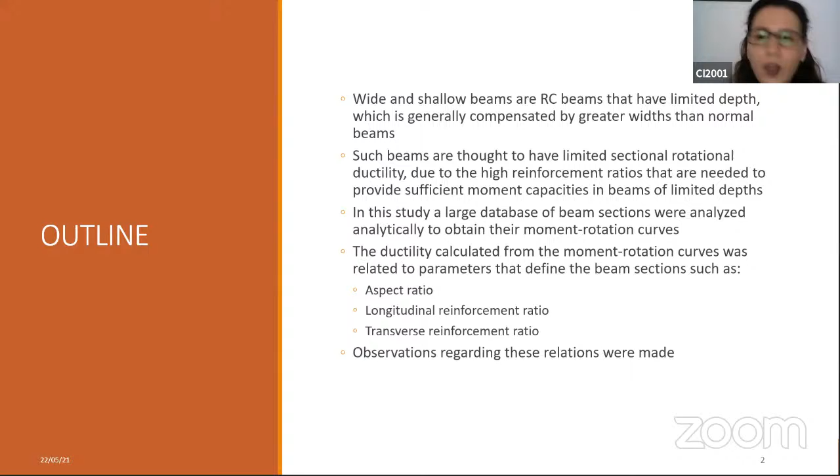We know that ductility is the ratio of maximum to yield displacement, and normally ductility is obtained experimentally from testing full-scale members and obtaining their force-displacement behaviors. But there are considerable software that work on FE principle, which can also help evaluate the force deformation relationships. We used one of these programs, XTRACT, to obtain the moment rotation relationships of the beam sections.

We modeled and measured these beam sections. It is an FE program for member sections. We used the Mander model to model confined concrete, and a strain hardening model for steel, and then we obtained the relationships that we wanted.

Regarding the data pool of the beam sections, we had some fixed properties. Mostly the material properties did not change; we used C30 for concrete and B420C for steel. Some properties varied: we had two types of beam depths, normal wide beams had a depth of 300 millimeters, and normal beams had a depth of 500 millimeters. The aspect ratio, defined as width divided by depth, varied from 0.5 to 2.33, and the reinforcement ratios also varied from design and loading.

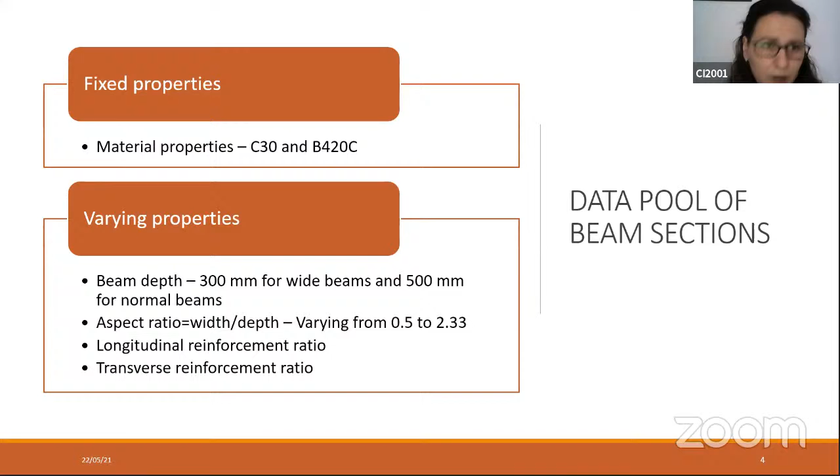Here we have schematically shown the normal and wide beams. Our normal beams all had a section of 250 by 500, while the wide beams had a depth of 300 and width varying from 300 to 700 millimeters. All these beams were designed in accordance with Turkish standards. The normal beams were designed as high ductility class, and the wide beams were designed as limited ductility class.

As I mentioned, these beams were obtained from a full frame design study. They were designed for different load combinations, and different reinforcement ratios and moment capacities were obtained for each of these.

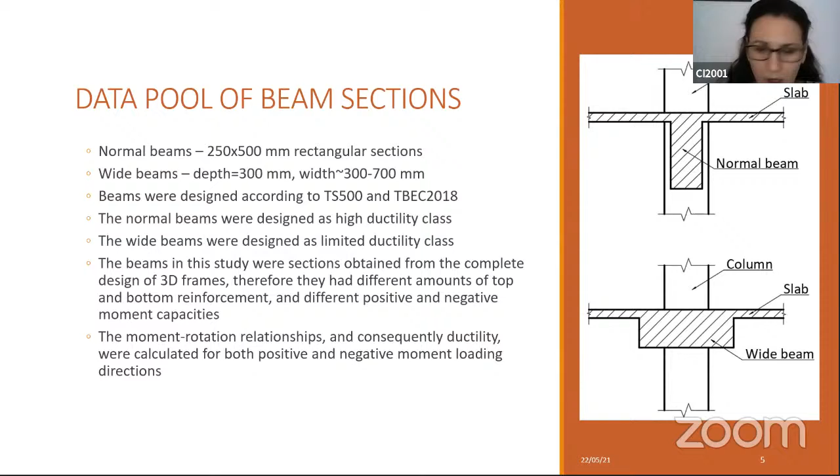Before starting investigating the ductility, we wanted to observe the reinforcement ratios versus the aspect ratio. As I mentioned, the aspect ratio is the one parameter that we can directly correlate to the beam being either wide or normal. All the normal beams have an aspect ratio of 0.5, and the rest of the aspect ratio values indicate that they are wide beams.

If we observe the relationship of aspect ratio with the top and bottom longitudinal reinforcement for the beams, we see that generally normal beams, with an aspect ratio of 0.5, have lower reinforcement ratios, while wide beams have higher reinforcement ratios. This is something we already expected. This is not a conclusion of our study, but just an observation.

When it comes to the transverse reinforcement ratios, in some cases wide beams had the same or greater transverse reinforcement ratio than the normal beams, and in most cases they had lower transverse reinforcement ratios.

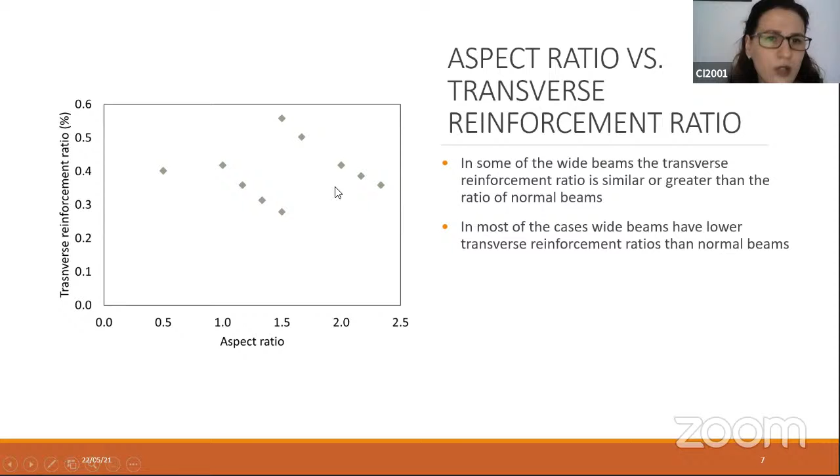Now, the parameter that we expected to have the greatest effect on ductility was the aspect ratio, and also this was the one parameter for which we could draw the strongest conclusion if we were to find relationships.

The values of ductility oscillate around 30. There is this range of 25 to 35 where most of the ductility values are concentrated, but there are also outlier values as low as 20 or even lower, and as high as almost 37.

So from the aspect ratio versus sectional ductility, we were not able to define a clear correlation between these two parameters. Similarly, when we obtained the relationship between ductility and reinforcement, we were not able to observe any clear correlation. For lower reinforcement ratios, there was quite a scatter in the data points.

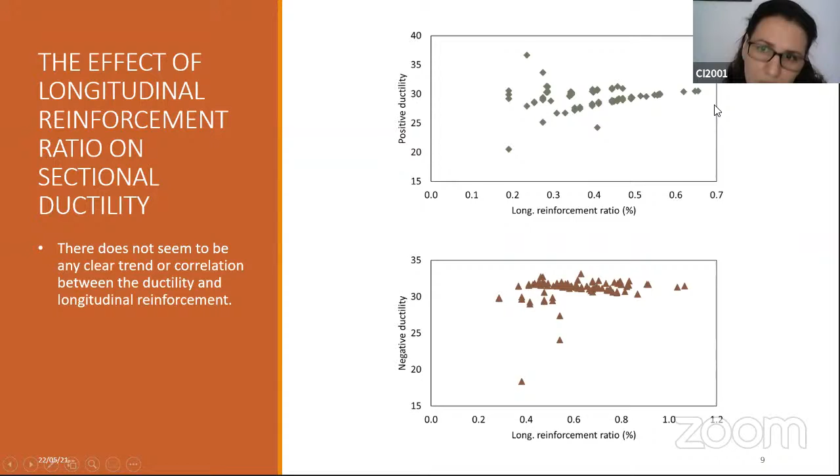The scatter became less when higher reinforcement ratios were present, but there was no clear correlation that we could obtain. Similarly, for the transverse reinforcement ratios, there was quite a scatter and no clear trend at all. For example, in the reinforcement ratios there was some sort of trend, a bit of convergence, but in the transverse reinforcement ratio this was not observed.

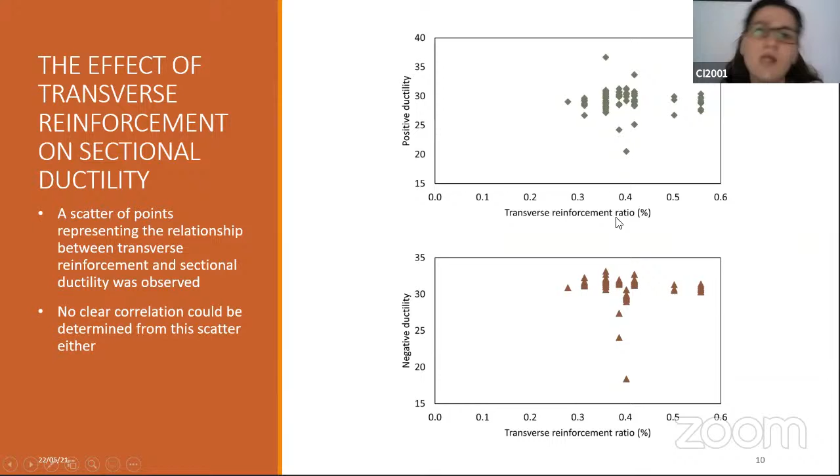So we thought, okay, none of these parameters alone seems to have a clear correlation with the ductility. We also observed that the ductility values seem to range in a certain value interval, so we thought that ductility could maybe be observed as a distribution.

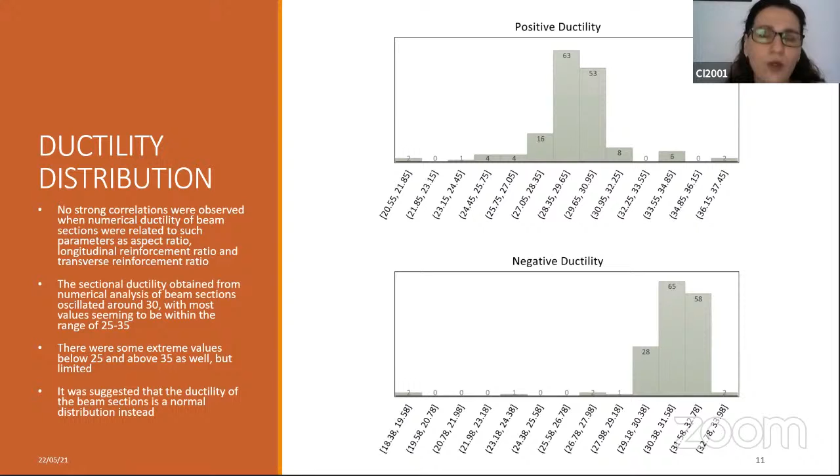So we plotted the histograms of positive and negative ductility values, and we can see that the histograms have quite a bell curve shape, especially the positive ductility, and a bit of a skewed bell curve shape in the negative ductility. So the ductility values for the beams are more of a normal distribution.

Also, if we observe the mean values of ductility, both for all the beams and for normal and wide beams in separate data sets, we observed that the mean values were very similar for the positive ductility and also quite close for the negative ductility, and the variance was very small as a matter of fact.

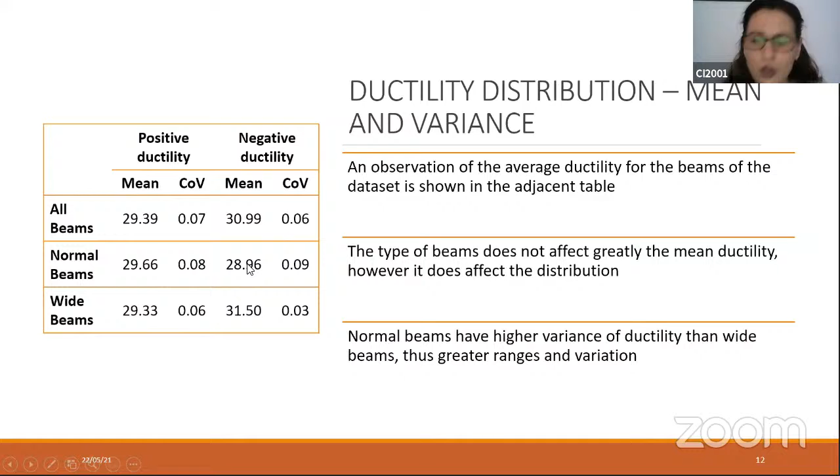So to wrap up the study that we did, we had a database of more than 150 beams that was investigated to draw relationships, if possible, between section parameters and ductility obtained numerically. All the beams were code-designed.

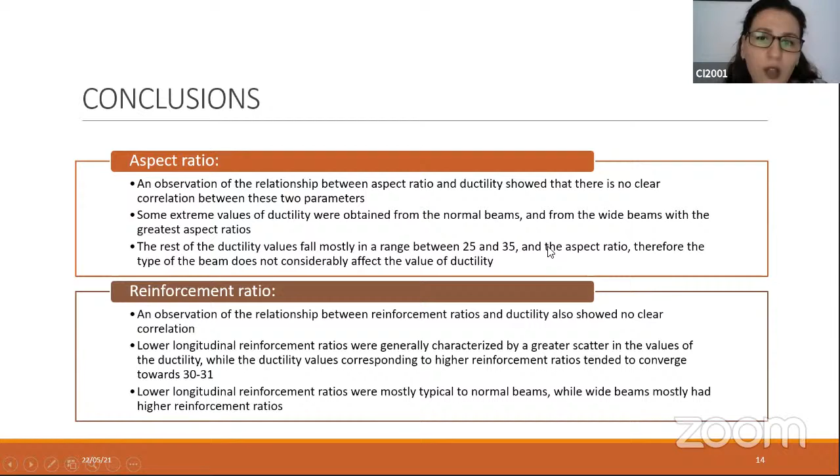Normal beams were high ductility and wide beams were limited ductility. But we were not able to find a clear correlation between ductility and aspect ratio, or ductility and reinforcement ratios. We observed that there was a ductility range mostly between 25 and 35, so we thought that ductility could be more treated like a distribution. This was also supported by the fact that the mean values of ductility were very similar for wide beams and normal beams.

While we were not able to find a correlation between the parameters, probably because the correlation is much more complex than ductility versus one simple parameter, we observed that all types of beams displayed similar levels of rotational ductility, even though they were designed differently, the normal beams as high ductility and the wide beams as limited ductility.

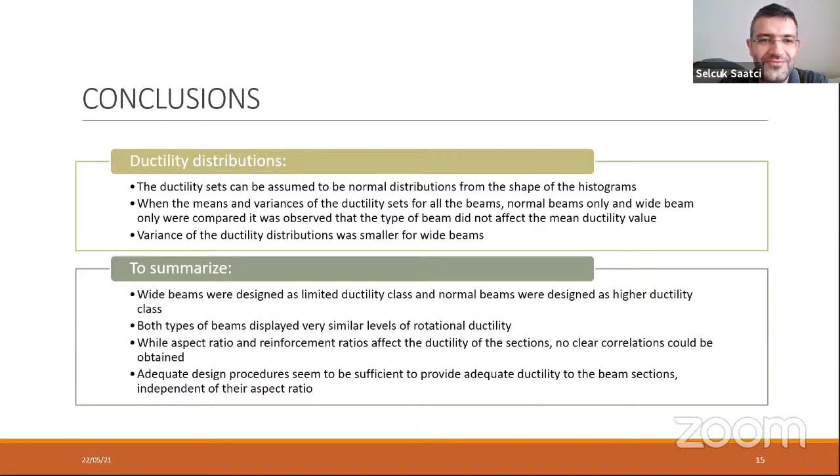Well, thank you, Ms. Lalaj. That was a very nice presentation, actually. I had the chance to be in Ms. Lalaj's PhD committee, and it's a very nice work. Thank you very much, it was a nice presentation. Thank you very much for your words, Professor.

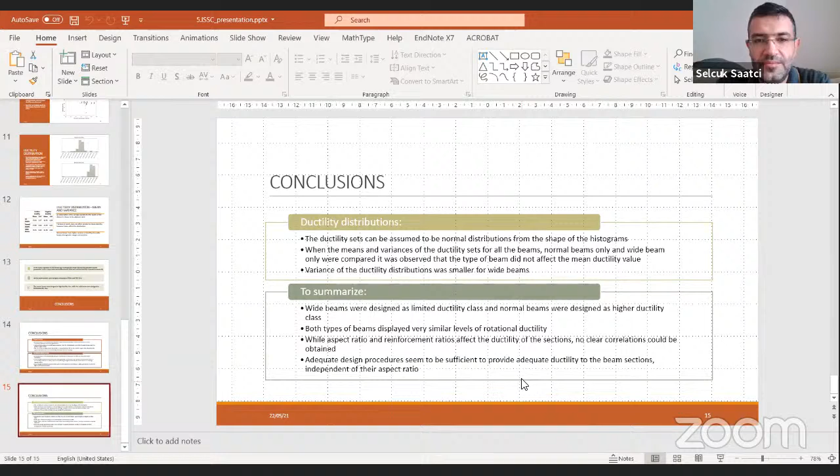Okay, so if we don't have any questions from the audience, we can move on to our next presentation by Mr. Ehsan. He will present the numerical analysis of flush end plate beam to column connection using mathematical model and finite element model.

Mr. Ehsan, if you can introduce yourself with a couple of words at the beginning, and then we will be pleased to hear your presentation. Hello everyone, can you hear my sound? Yes, hello everyone, my name is Mohammed Haroon Ehsan. I am from Afghanistan, and I am a master's student in Khatib University in the Civil Engineering Department. I'm in Turkey since 2017.

My topic is, let me share the presentation. The title of the topic is the numerical analysis of flush end plate beam to column connection using mathematical model and finite element analysis.

In the analysis and design of steel structures, beam to column connections are generally assumed as entirely rigid or perfectly pinned. This assumption simplifies analysis and design steps and is referred extensively in structural engineering practice. However, experimental studies conducted in recent years have revealed that handling some beam column connections as entirely rigid or perfectly pinned does not give realistic results. In fact, most of the connections used in current practice have some certain amount of stiffness which falls between the extreme cases of entirely rigid and perfectly pinned.

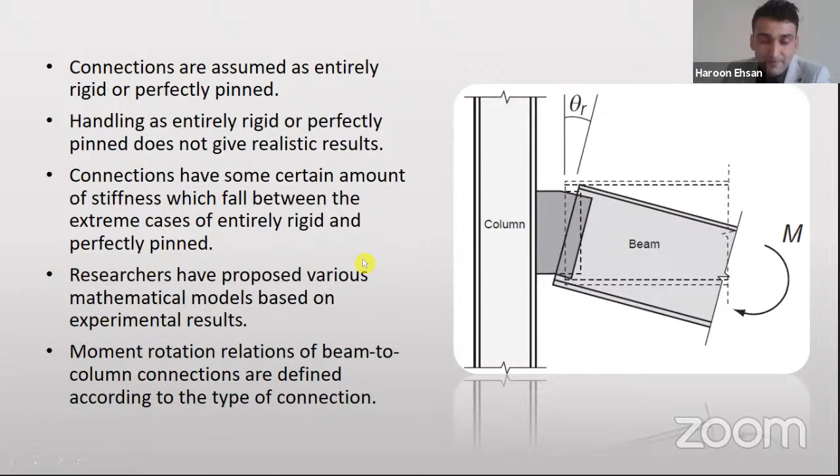In order to model the beam to column connection properly, several researchers have proposed various mathematical models based on experimental results. In these models, the moment rotation relation of beam to column connections is defined according to the type of connection. In this study, the moment rotation behavior of beam to column connection formed by flush end plate is investigated using finite element analysis and a well-known practical mathematical model. Moreover, the numerical analysis outcomes were compared with the test results of a reference study from the literature.

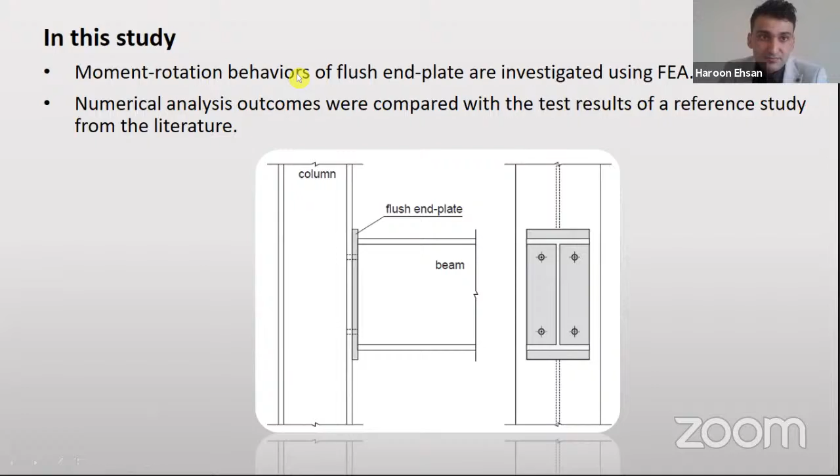These papers also showed the importance of structural design parameters in determining the moment rotation relationship of flush end plate type beam to column connections, and evaluated the efficiency of the practical numerical models. End plates are widely used in steel structures, which consist of two main types: extended end plate and flush end plate. Various analytical and numerical methods have been developed to study the semi-rigid characteristics of beam to column joints, as well as their influence on the response of structural elements.

In order to predict the moment rotation behavior accurately, a large number of studies have been performed on end plate bolted joints considering experimental, numerical, and analytical approaches. The types and details of the studied connections are numerous and innovative, and they concern many parameters such as diameter and number of bolts, pretension force of bolts, thickness of end plate, beam and column dimensions, steel yield strength, stiffening type, and coefficient of friction between contact surfaces.

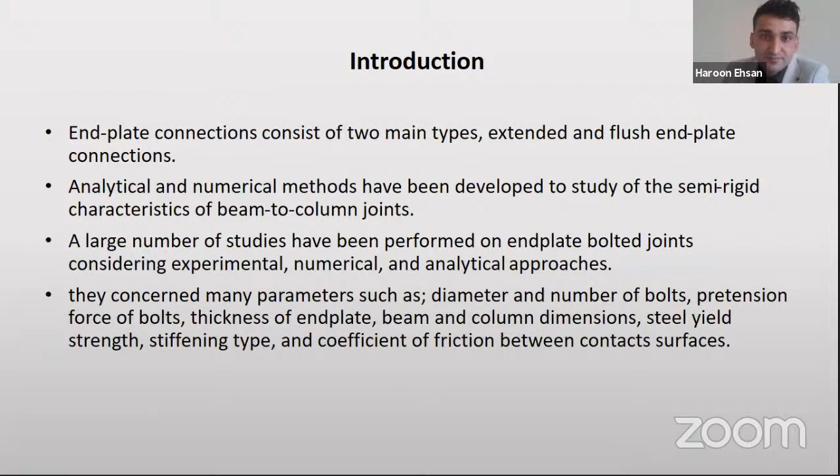The first finite element analysis of end plate connections was performed by Krishnamurthy. Tarpy and Cardinal carried out an elastic finite element study of unstiffened end-plate connections that was verified experimentally, and they also proposed a design methodology for these joints. Maxwell also developed a prediction equation for the ultimate moment of connections, as well as their moment rotation relations, based on finite element analysis and on tests.

Jenkins also did finite element analysis on flush end plate connections, and those extended on one side, then put forward a bilinear model for flush end plate connections. Kukreti adopted a two-dimensional finite element analysis model to calculate 50 flush end plate connections and verified the recommended moment rotation relationship for this type of connection based on regression analysis.

Sherbourne and Bahaari used two-dimensional and then three-dimensional finite analysis models to model end plate connections. Ade indicated that the presence of stiffeners on the extended part of the end plate increased the flexural strength of the connections, as well as its rotation and energy dissipation capacity.

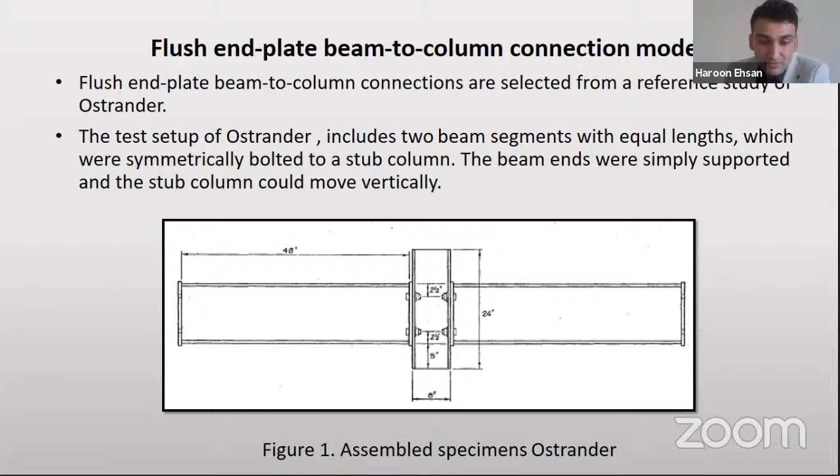The geometries of connection models: Ostrander's experiments include 24 test specimens of flush end plate connection. In this study, 7 specimens representing various types of configurations are accounted for, with end plate thickness and stiffeners of the column web as the main parameters focused on. The geometric properties of the 7 connections analyzed in this study are presented in table 1.

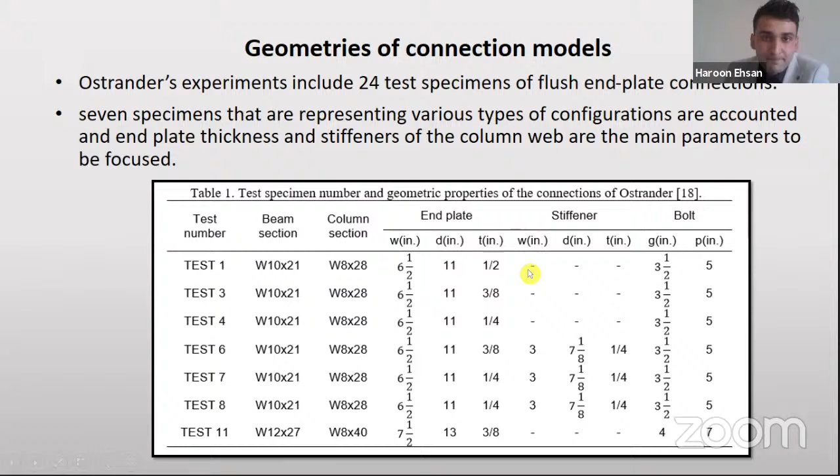Finite element modeling: the three-dimensional finite element model is used to generate the effective moment rotation response of the connection. Geometric details of all components used in flush end plate connections are the same as those of the tested specimens given in table 1. Due to the symmetry of the geometric details, loading, and boundary conditions, only the connection on one side of the cruciform arrangement was modeled to reduce computing time.

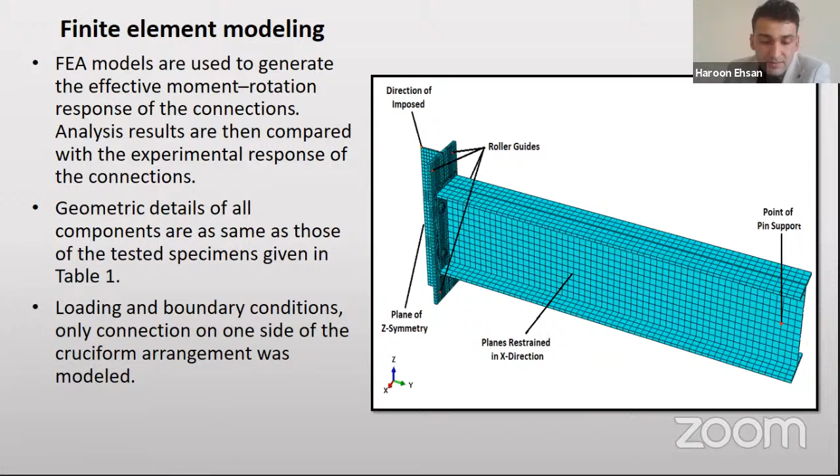The hexahedral solid element C3D8 type with 8 nodes was used with reduced integration and hourglass control as the element type. The mesh density was increased in the critical zones of the connection. The contact area, including the bolt head and nut components, was modeled by implementing the penalty contact algorithm with a finite sliding scheme. The normal behavior between two surfaces is defined as hard contact, and the coefficient of friction was taken as 0.33 in the tangential direction.

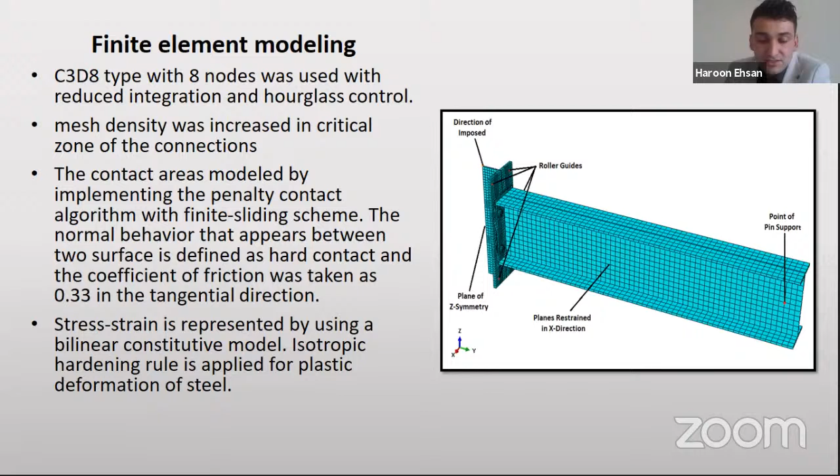Boundary conditions and applied loads: the boundary conditions defined on the model realistically reflect the experimental setup. In order to disallow local deformation under the concentrated force, the column top surface is coupled through a coupling constraint to the load application point.

The bolt pretension load is applied as the first load case, and for this purpose a thermal gradient is applied on the bolt shank to yield an equivalent pretension force. A force of 133 kilonewton is applied to the 19.1 mm diameter bolt. A 50 mm vertical displacement is applied on the nodes of the load application point.

The resulting moment and relative rotation of the connection are evaluated from equations 1 and 2. The moment is evaluated from equation 1, and the rotation is evaluated from equation 2, where M is the applied moment, P is the summation of the reaction of the applied displacement on the beam, L is the beam length, R is the rotation, and D1 and D2 are the top and bottom flange horizontal displacements respectively.

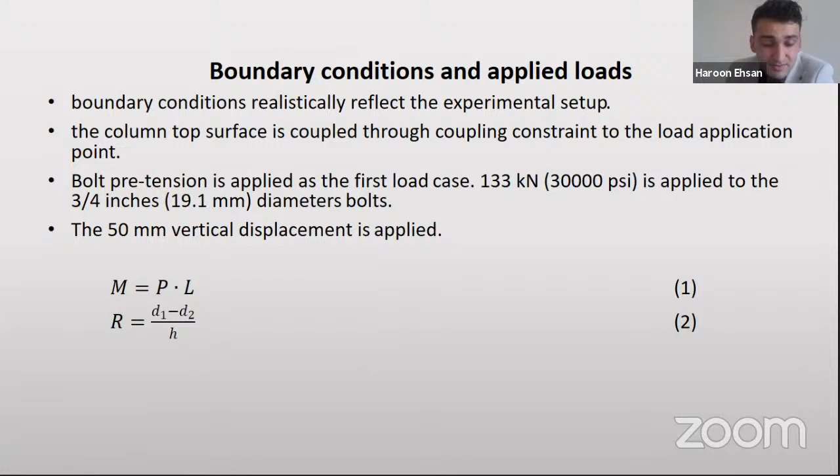Effect of bolt pretension load: now it's possible to extend the study of the connection beyond the experimental data, having the prediction capability of the proposed modeling approach. The model is used to study the effect of bolt pretension on the response of the flush end plate beam to column connection. A variation of pretension load is modeled in order to monitor its effect.

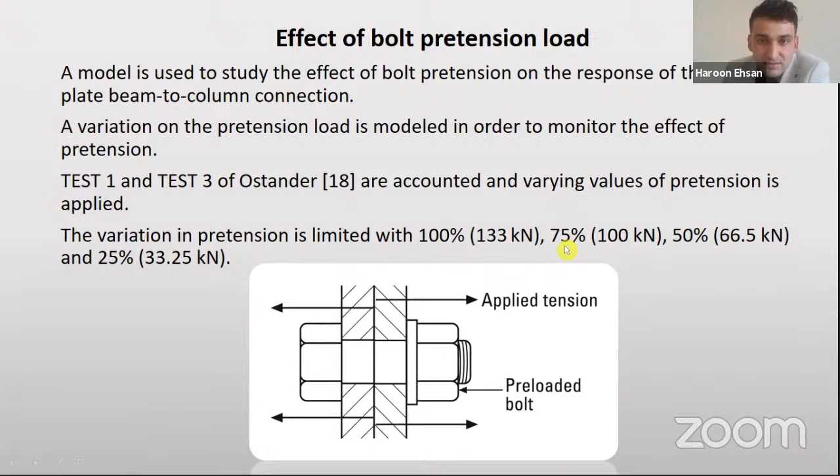Test 1 and test 3 of Ostrander are considered, with varying values of pretension applied. The variation of pretension is set as 100% equal to 133 kilonewton, 75% equal to 100 kilonewton, 50% equal to 66.5 kilonewton, and 25% equal to 33.25 kilonewton. The analysis results of test 1 and test 3 with varying pretension load are shown in figure 5 and figure 6. Figure 5 shows the moment rotation response of test 1 connections with varying bolt pretension at 100%, 75%, 50%, and 25%.

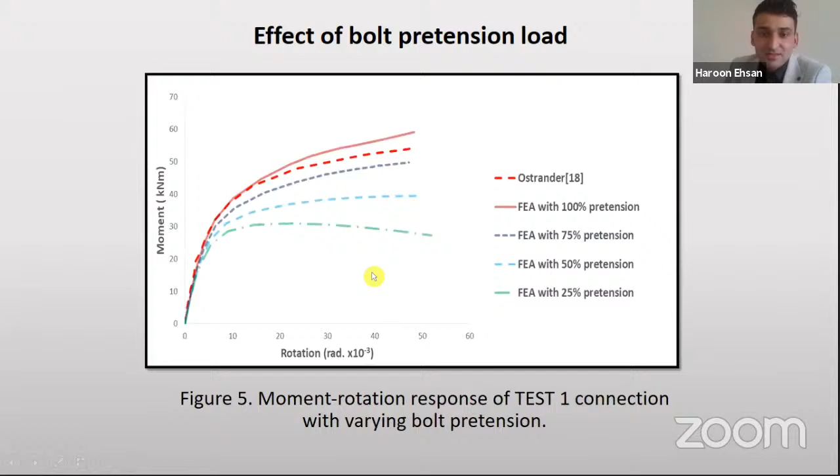And conclusion. In this study, the moment rotation behavior of bolted flush end plate connections are investigated using a three-dimensional finite element model and a practical mathematical model. The numerical analysis results are compared with the test results of a reference study from the literature. Analysis results show that the finite element analysis and mathematical model have good agreement with the test data of the reference study. On the other hand, the effect of bolt pretension load on the response of flush end plate connection is focused. The finite element analysis results reveal that pretension loads have a significant effect on the moment rotation curve of flush end plate type connections.

Thank you for listening. Do you have any questions?

Okay, thank you, Mr. Ehsan. Do we have any questions from the audience? Well, thank you again, it was a very nice presentation and nice study. Are you about to finish your study, or are you in the middle of it?

My study is... no, I haven't finished yet. My study will maybe be finished this semester. This topic is a part of my study.

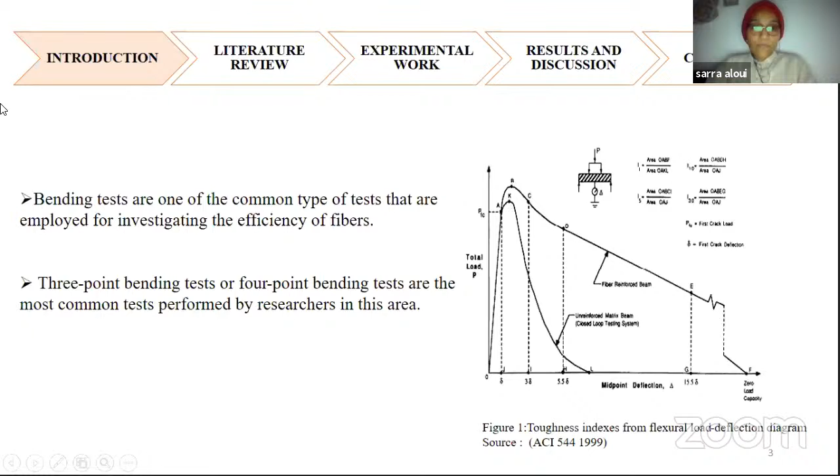The objective of this study is to improve our knowledge on the use of hybrid reinforced concrete beams, where steel and polyvinyl alcohol, named as PVA fibers, are used in the same mix under 3-point and 4-point bending tests, as well as to obtain the effect of fiber hybridization on the bending behavior.

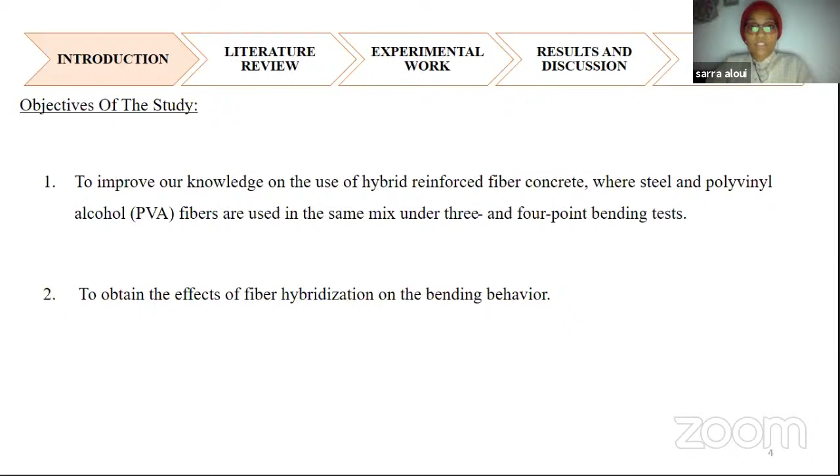In the literature review part, two articles will be presented. The first one, done by Zhang in 2019, tested specimens with the usage of PVA under 4-point bending test with different volumetric ratios, from which we could conclude that PVA fibers can improve the flexural strength of concrete and can decrease crack propagation.

The second one is done by Caggiano in 2016, where a high amount of steel fibers in the mix was concluded to be more advantageous, as well as we could conclude that a high amount of polypropylene can result in a general reduction in strength and toughness.

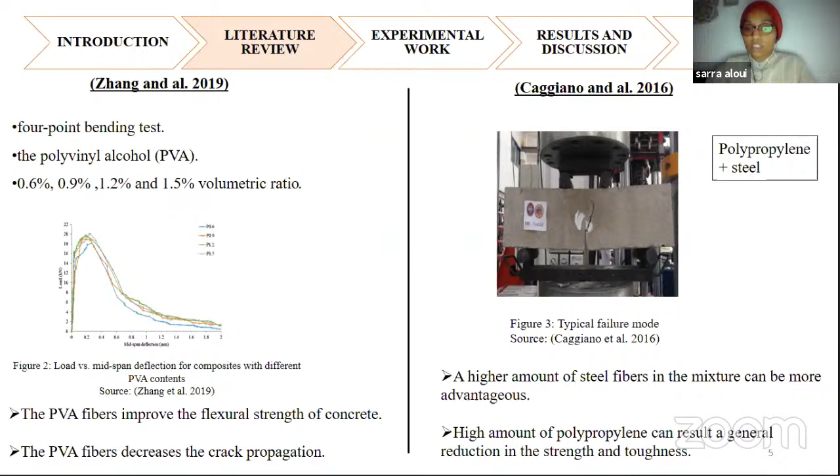Now I'm passing to the experimental work. During this project, we cast a number of beams in the laboratory, where the concrete mix content mainly had Portland cement, class F fly ash, and two types of aggregates, in addition to a superplasticizer. As reinforcement, two types of fibers were used.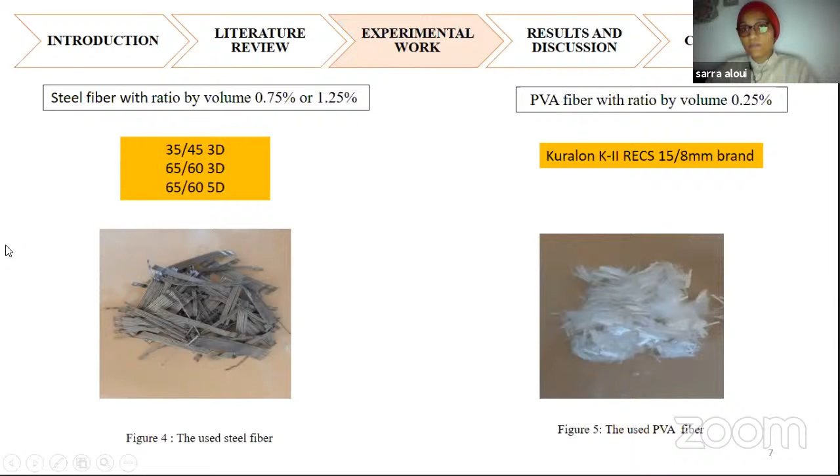The first one is steel fibers, of which we used three types, shown in figure 4, and the PVA fibers shown in figure 5.

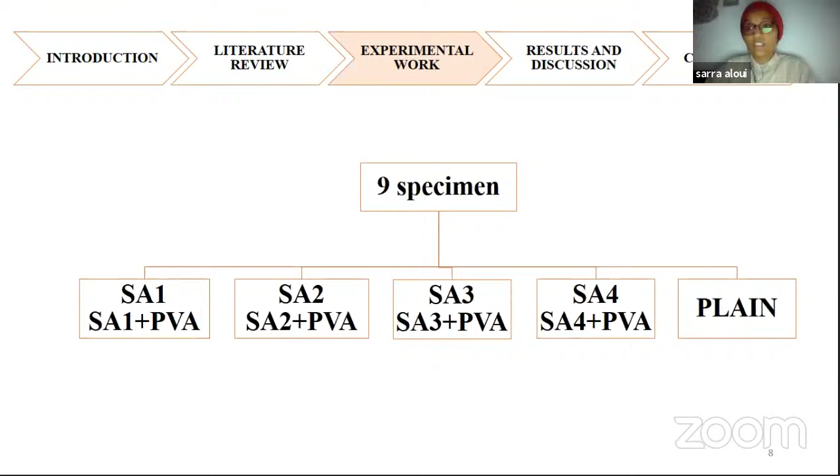To obtain the best results, 9 specimens were cast, named SA1, SA2, SA3, and SA4. For each of them, 2 specimens were cast: the first containing just steel fibers, and the second containing both steel fibers and PVA. The last one is named plain. It does not contain either steel fibers or PVA; it's done just for the controlling part. This table can show us more.

Specification of the specimens: for SA1, SA2, and SA3, the steel fiber content is equal to 0.75%. But for specimen SA4, it has a higher steel fiber content equal to 1.25%. The PVA fiber content is stable for all of them at 0.25%.

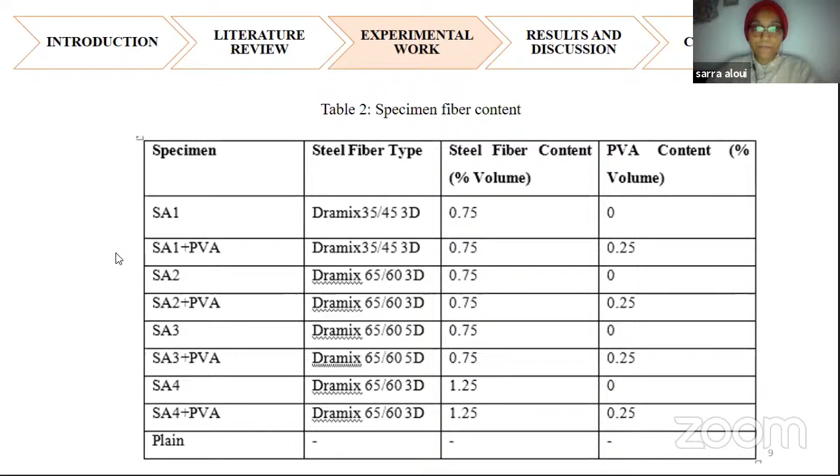To obtain the best results, 3 tests were executed in the laboratory. The first is a 3-point bending test, where beams with dimensions of 2.5 length, 0.5 width, and 0.05 height were tested, with the specimen in simply supported conditions, as shown in figure 6. A load was applied by a displacement-controlled hydraulic actuator at the mid-span, with a steel cylinder forming a linear load distribution. 12 linear resistive position transducers were attached at the bottom of the specimen, and a load cell was applied under the loading head of the hydraulic jack to measure the applied load.

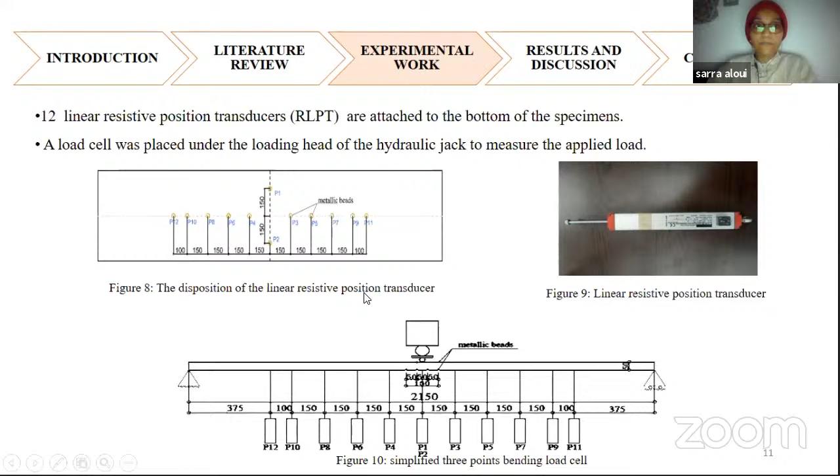During this experimental work, the crack opening was also observed manually with the use of a digital movement gauge, for which we placed metal beads distributed as shown in figure 11.

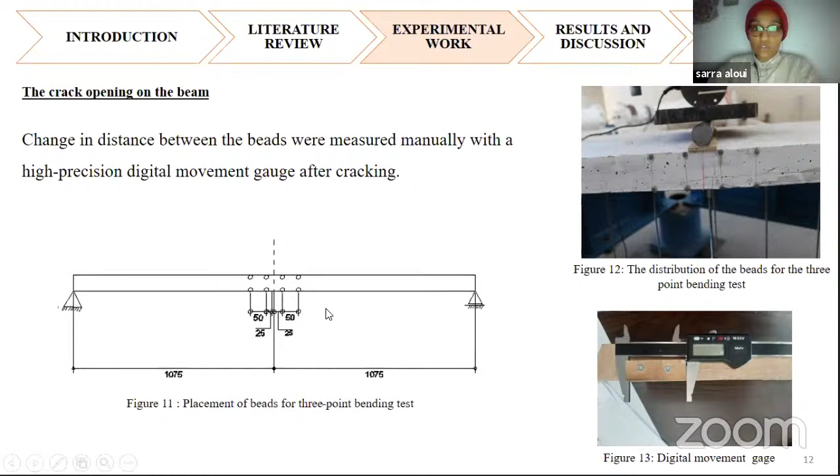The second test is the 4-point bending test, done after the first test. The beam that cracked at the mid-span was cut, and the half that did not see big damage was tested again.

The 4-point bending test was done with the usage of a rigid beam, as we can see here. For this case, just 2 linear resistive position transducers were placed at the mid-span, named P1 and P2.

As well, for the first test, we observed the crack opening by placing the metallic beads.

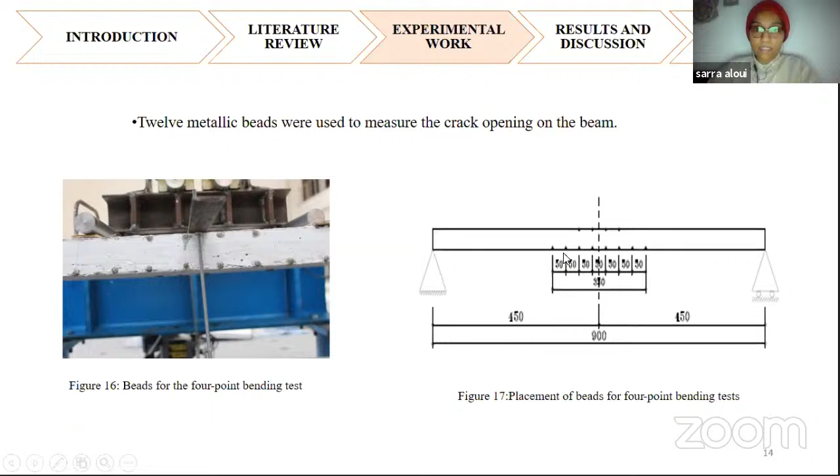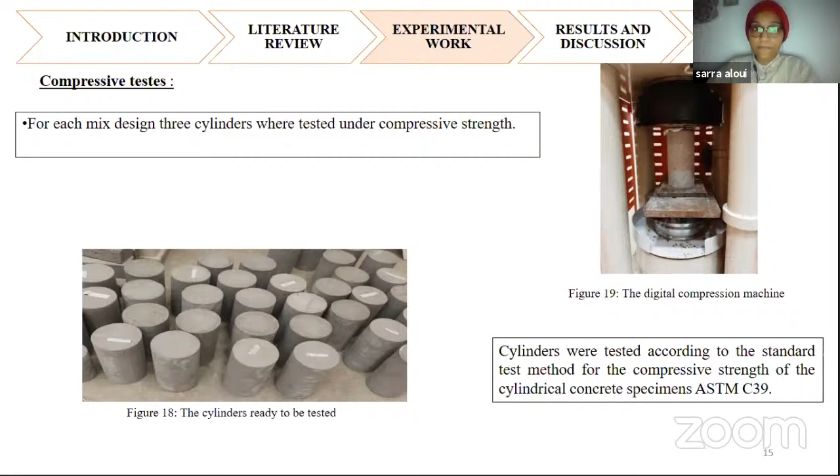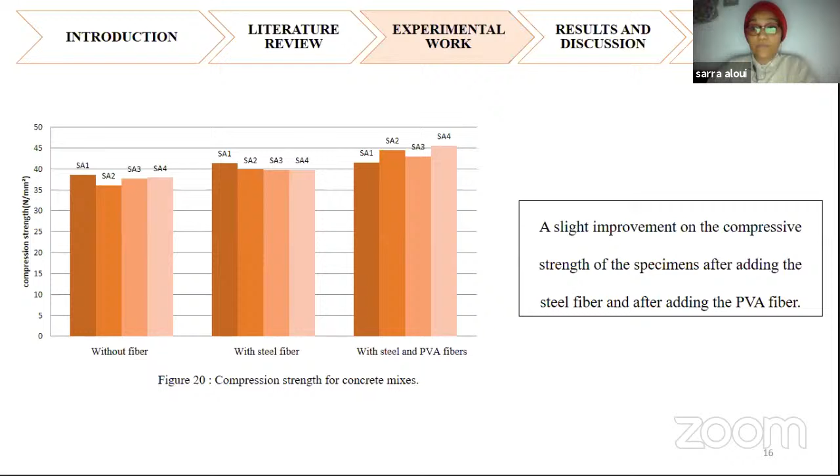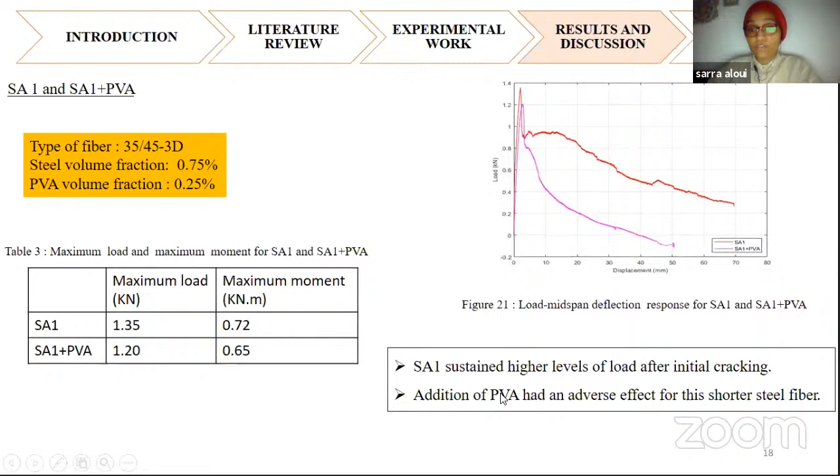For the first specimen, SA1, the specimen with the usage of PVA has a lower maximum load compared to the specimen with steel fibers. We can say that the addition of PVA has an adverse effect for the short steel fibers.

The second one, SA2: here we can see that the load dropped for the specimen with the usage of steel fibers and then rises again. We can see the difference between the maximum load for both specimens. We can say that the addition of PVA has an adverse effect for this mix.

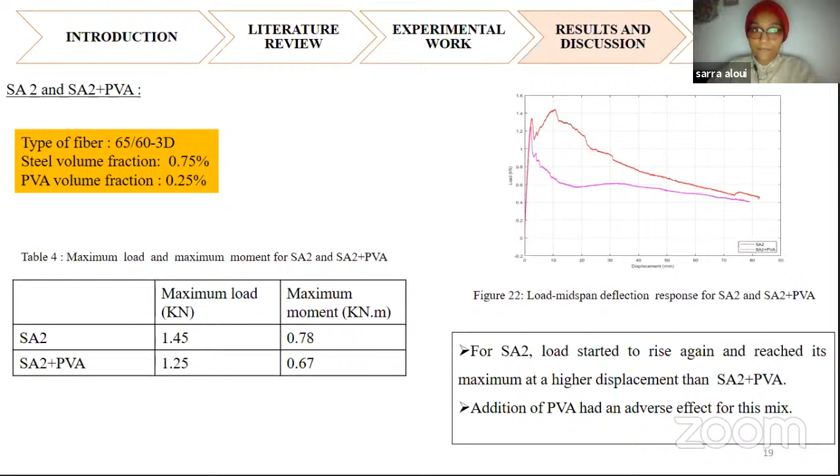The fourth one, SA4, has a higher content of steel fibers. We can see the big difference between the maximum load and maximum moment between the two specimens. Here we can say that the addition of PVA has a serious adverse effect for this mix.

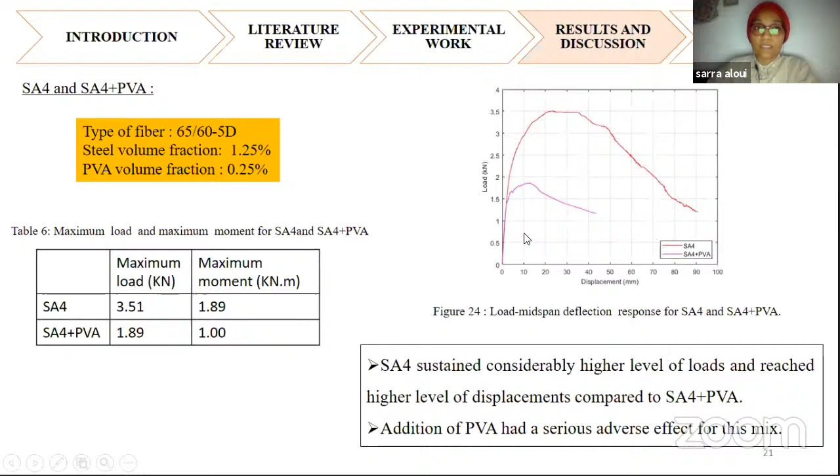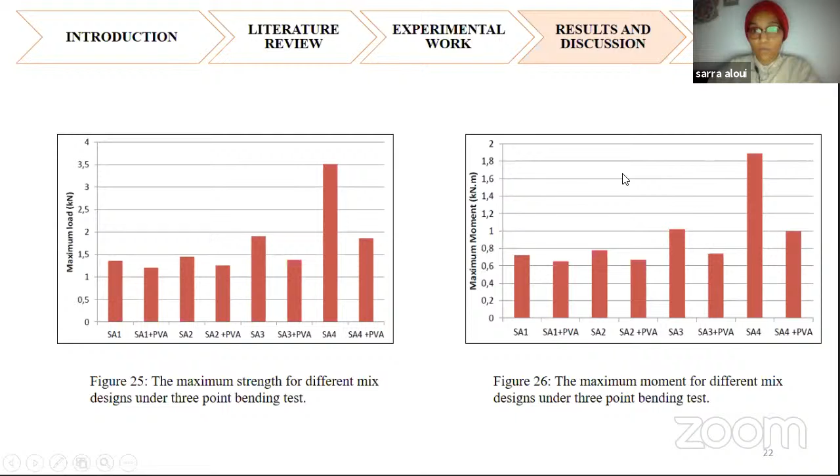From this we could obtain this graphic: we can see that SA4, the last specimen, has the highest maximum load and maximum moment compared to the other specimens. Also, continuing observation of this table, we can say that SA3 also has a high maximum load compared to the others.

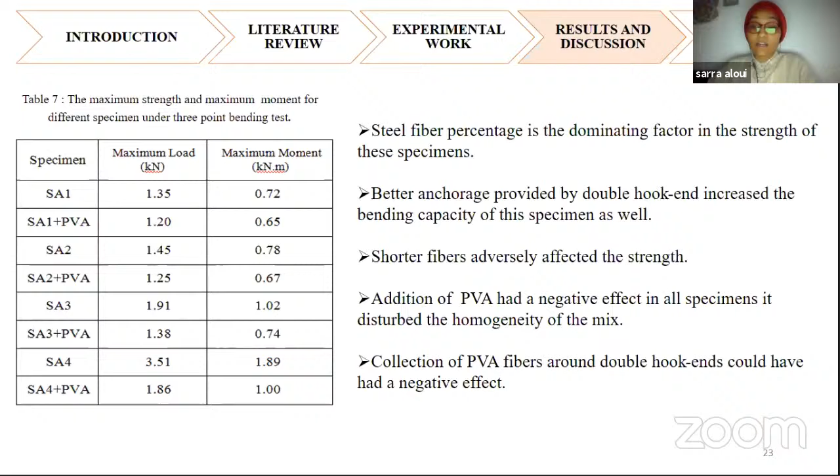We can say that better anchorage is provided by double hooked ends, which increases the bending capacity of this specimen. But for the shorter fibers, it can adversely affect the strength. Generally, we can see from this table that the addition of PVA has a negative effect in all specimens; it disrupts the homogeneity of the mix. This is due to the fibers collecting around the double hooked ends.

Now we are passing to the 4-point bending test.

For the second one, they have a very nearby maximum load. So we can say that the addition of PVA have a neutral effect for this type of steel fibers.

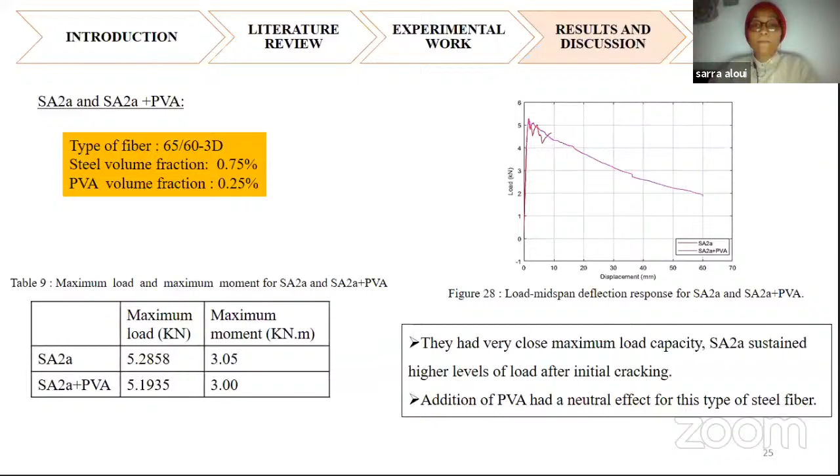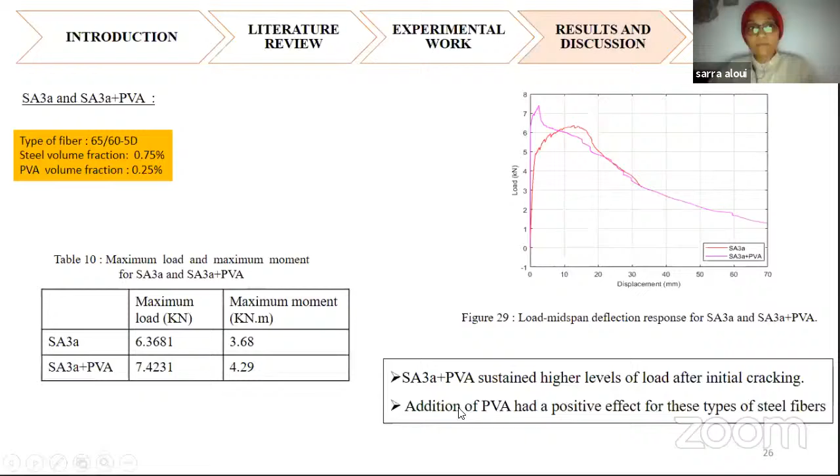For the fourth one, that contains more steel fibers, here we can say the addition of PVA have had a serious adverse effect. So the addition of PVA is not a positive addition for this specimen.

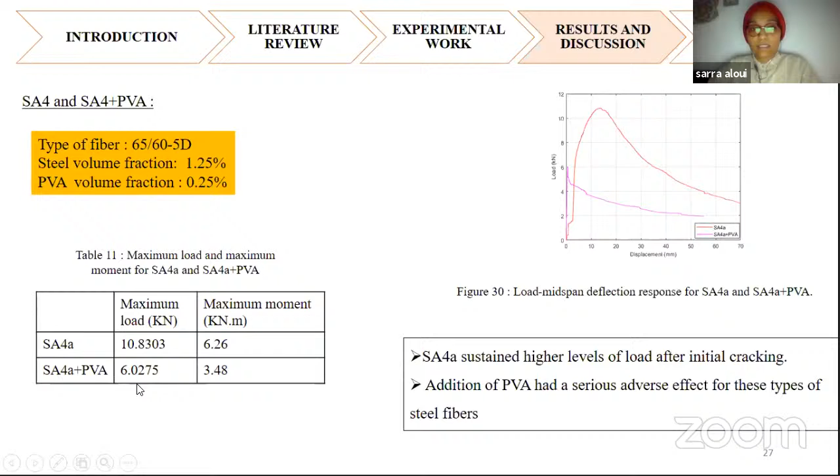If we look at this figure as well, we can see the specimen SA4 have the highest maximum load and maximum moment. From the table we can see that for this type of test, the 4-point bending test, the addition of PVA have a positive effect for all the specimens besides the SA4, because it contains more steel fibers content.

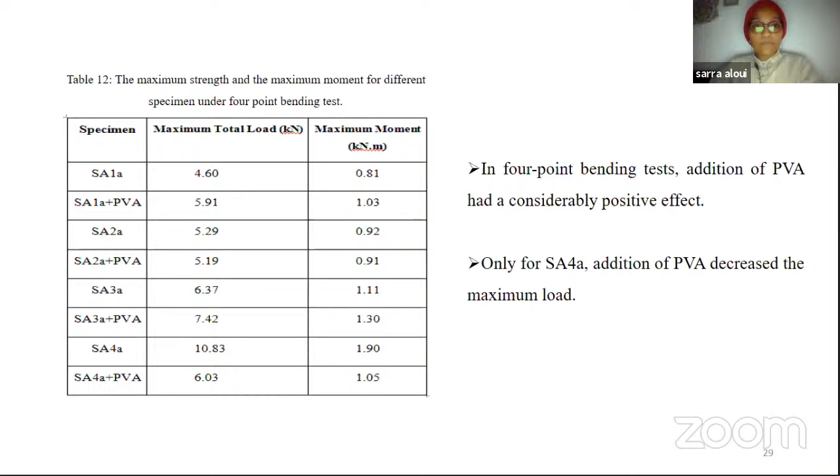Here, if we look at this graphic, the maximum moment for the steel fibers only specimen, that contains just steel fibers. If you compare the 3-point bending test and 4-point bending test, they have very nearby results, but still the specimen with the addition under the 4-point bending test have a higher maximum moment.

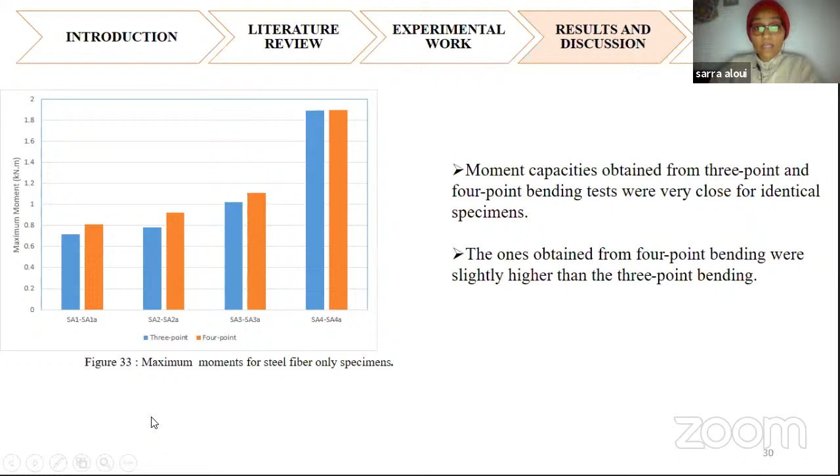But if we look at the maximum moment for specimen with the usage of PVA under the 3-point bending test and the 4-point bending test, here we can say the specimen with the 4-point bending test have the highest maximum moment compared to the other.

Generally we can say that in the 3-point bending test, the maximum moment was at midspan, which caused localization in the cracking. But for the 4-point bending test, the maximum moment acts over a region at the middle, which causes several minor cracks along with a major crack.

Now I'm passing to the conclusion.

The steel fiber geometry, type, and ratio are the principal factors that affect the level of load of the specimen. Like we can see here, the short steel fibers have the lesser maximum capacities. But for the specimen with the long steel fibers, they have a higher maximum load.

Also the type, so specimen with a double hooked end have a higher maximum capacity, or the ratio. So we can see that specimen SA4, which has a higher amount of steel fibers, has a higher maximum capacity.

But we can see here that for the 3-point bending test, the addition of PVA has an adverse effect. It always drops the maximum capacity of the specimen.

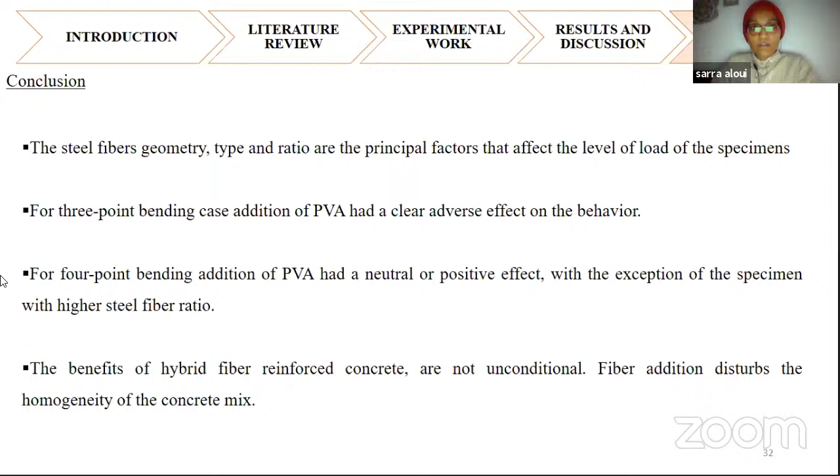First, we're going to introduce some concepts and present the methodology we use to conduct this work. From there, we'll present the experimental study that has been done before, then use the data from this study to create a finite element model with dynamic analysis, and compare both experimental and numerical results.

As we say, the importance of nonlinear biaxial models applicable to the analysis of reinforced concrete frames has been studied by many researchers and proven important in seismic regions.

Reinforced concrete frames are usually subject to a combination of axial and lateral action, as the lateral action causes lateral deflection that in turn affects the horizontal stiffness. So there's a need to simulate the nonlinear behavior of the reinforced concrete frame due to material nonlinearity, and also to model the behavior of the interaction between frame and reinforcement.

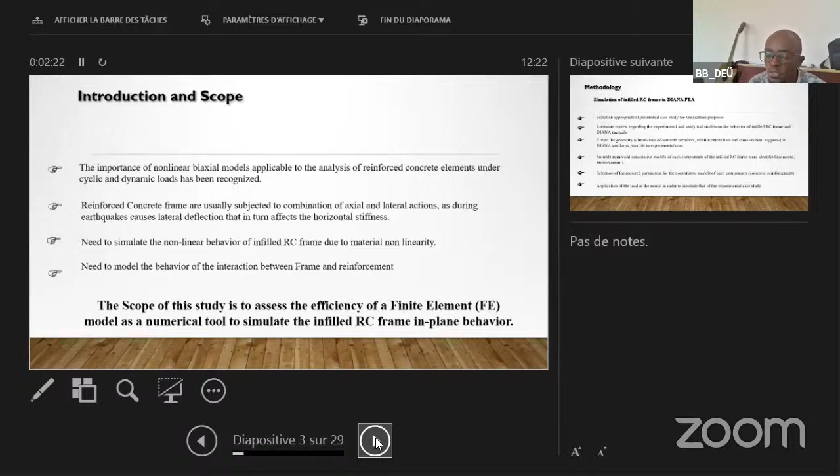The methodology will be to select an experimental case study for verification purposes, review the literature regarding experimental and analytic studies, and review the DIANA manual. Then we create the geometry, depending on the dimensions of concrete members like beam, column, and foundation based on the literature review, along with reinforcement bars and cross sections, and boundary constraints in DIANA made as similar as possible to the experimental case.

A suitable numerical constitutive model of each component of the infill reinforced concrete frame is identified, such as concrete and reinforcement. Then we select the required parameters for the constitutive model of each component, for concrete and reinforcement. Finally, we apply the load in the model in order to simulate that of the experimental case study.

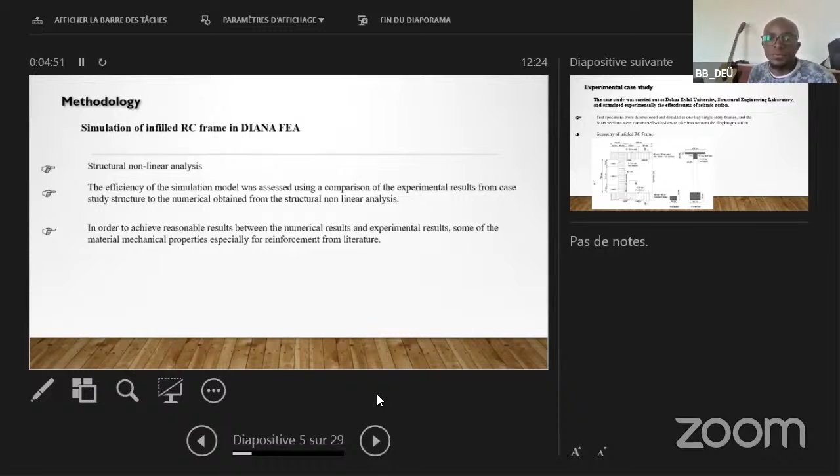In the experimental case, the tests were dimensioned and detailed as a one-bay single-story frame, and the beam section was constructed with a slab to take into account the diaphragm actions.

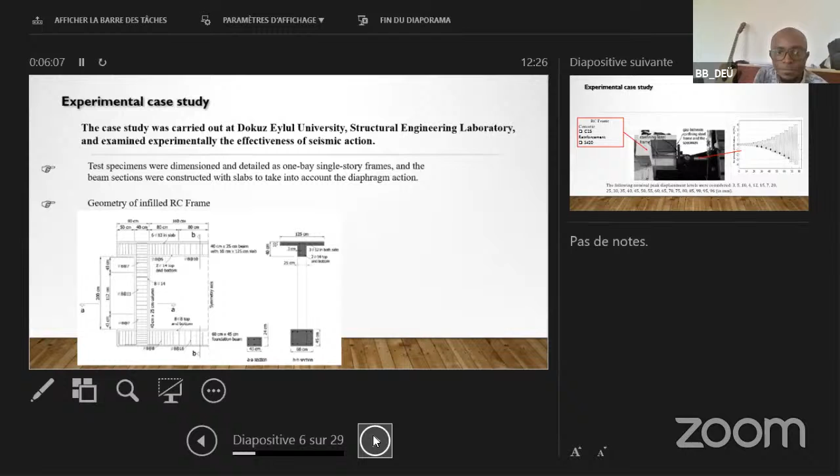As a result of the experiment, the first flexure crack on the column appeared at a drift ratio of 0.20, which corresponds to 85.4 kilonewtons. It's the same for the beam, shown here in this row.

First yielding of longitudinal reinforcement in the frame member occurred at a drift ratio of 0.35, corresponding to 117.3 kilonewtons. The observed maximum top load occurred at 2.75, corresponding to 243.5 kilonewtons.

The maximum drift ratio reached was 4.09, corresponding to 209.3 kilonewtons. These results will be compared with our model conducted using DIANA.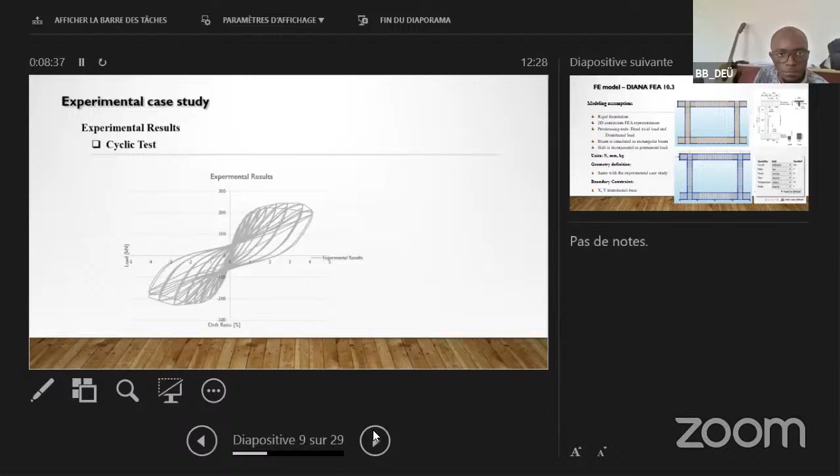For the finite element model in DIANA, we take the dimensions from the experiment and define a foundation, a column, and a beam. Something interesting here: we include a slab as a permanent load in DIANA. So the beam is simulated as a rectangular beam, and the slab is incorporated as a permanent load.

Units used are Newton, millimeter, and kilogram. The geometric definition is the same as the experimental case study. As a boundary condition, the XY translational base was constrained.

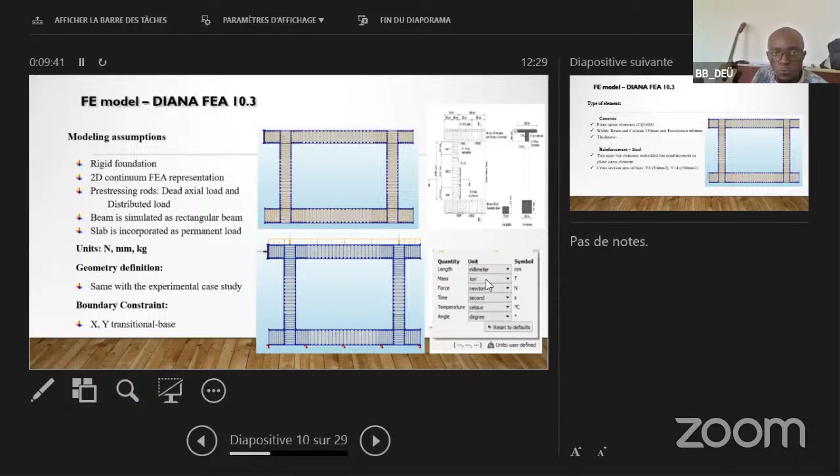So the type of element, we got two elements, concrete and steel reinforcement. For concrete, the concrete will be modeled as mentioned in the DIANA manual, using plane stress elements, and width for beam and column is 250 millimeters, and for foundation, 600 millimeters.

For reinforcement, we take two node bar elements embedded in plane stress element. The cross-section area of bar diameter 8 corresponds to 50 millimeters square, and diameter 14 corresponds to 150 millimeters square. Here we can see it in this picture.

For mesh, we take a square mesh and define 50 millimeters for the plane stress elements. So the size of mesh and the method taken was quadratic, as defined in DIANA. You can see in the picture on the right here.

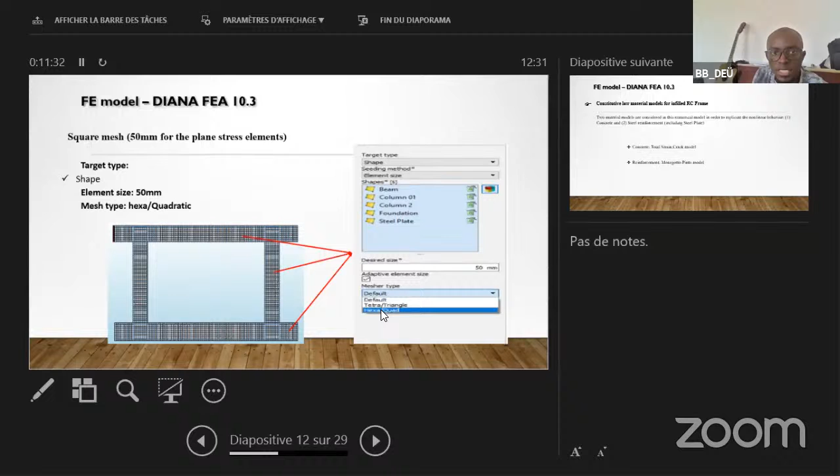So we have a beam and 2 columns, and also for steel, and for shape. The mesh type we take is hexa quadratic.

For constitutive law material model, we define for concrete the total strain crack model. This model well describes the propagation of crack for the material.

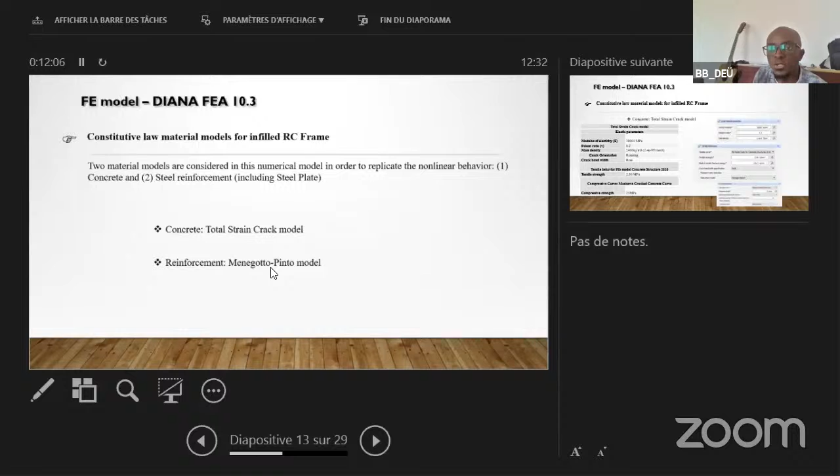And for reinforcement, we use the Menegotto-Pinto model that shows good agreement for cyclic curve.

Here we define all parameters for the total strain crack model, describing the concrete: modulus of elasticity, Poisson ratio, mass density. For crack orientation, we take rotating. For crack bandwidth, we use values from the literature, Rots.

For tensile behavior, we use the fib model concrete structure code, and the tensile strength is defined. For the compressive curve, to find the hysteretic curve, we use the Maekawa cracked concrete curve. Also, we define the compressive strength, which is 25 megapascal.

So here we have illustrated the parameters of DIANA.

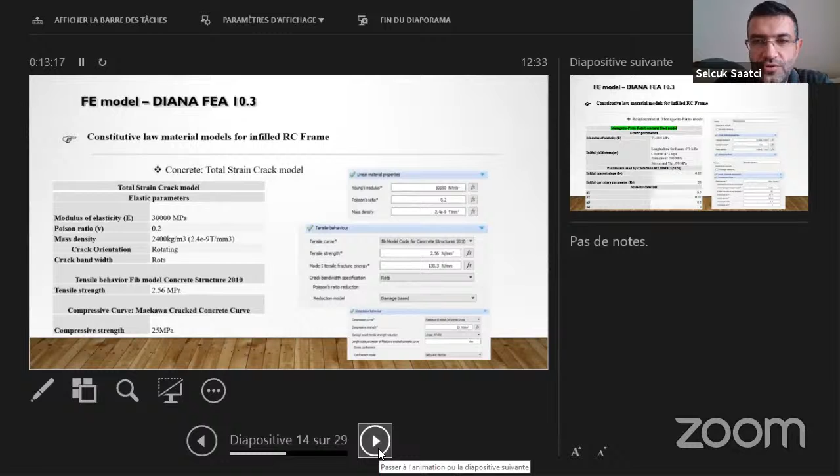Mr. Bakala, we are running out of time, so if you can come to your results in a few minutes. Yeah, I'm coming. This is for reinforcement, for Menegotto-Pinto, all the parameters.

And here we define a steel plate. For cyclic loading, the nominal peak displacement was taken the same as the experimental. And you see how we define the constraint, load, and displacement described.

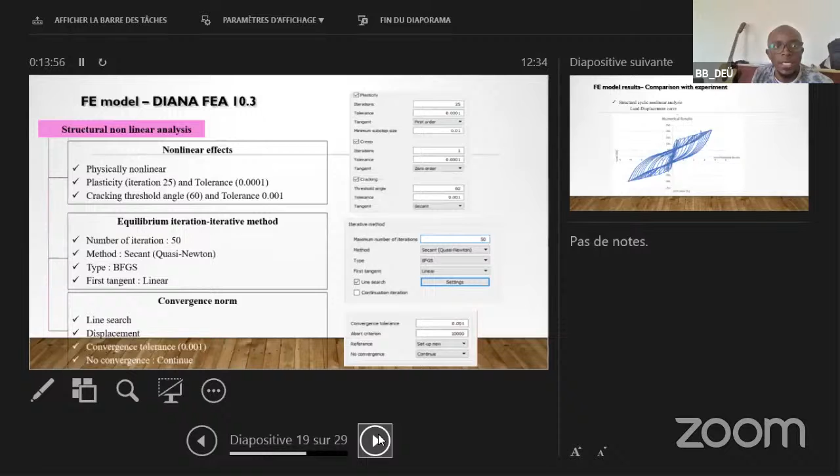As a result, we get the load displacement curve. In this figure, we see there is pull and push. So push is more stiff than pull in our case. And also there is good initial stiffness.

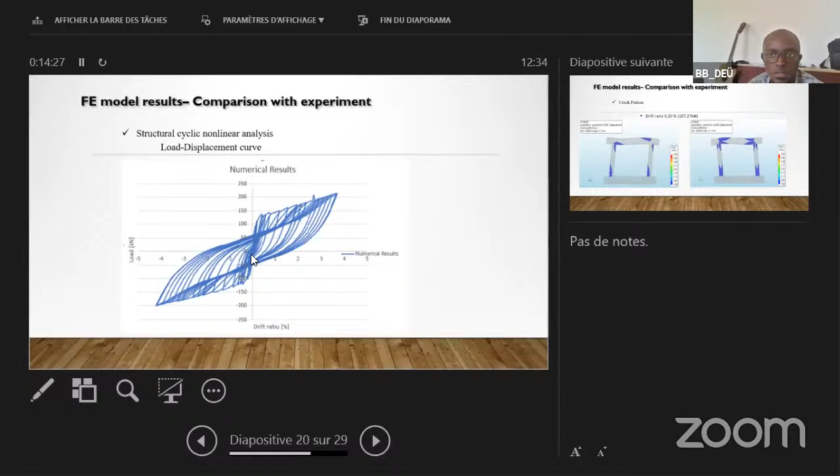Talking about crack pattern, we get the drift ratio at 0.20%, we get 107.27 kilonewton. And at a drift ratio of 0.35, we get 113.97 kilonewton.

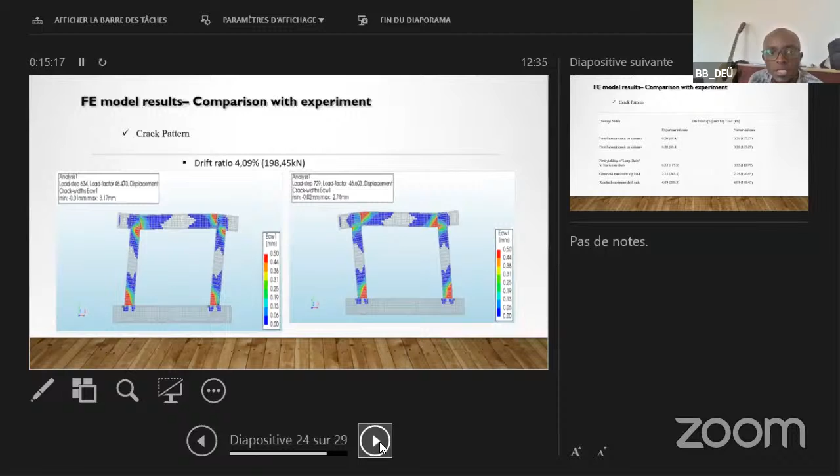It's quite, there is not a big difference in terms of loads. And also for the first yielding here, there is not a big difference, as you can see in all values. So based on this, the result matches with our experimental campaign.

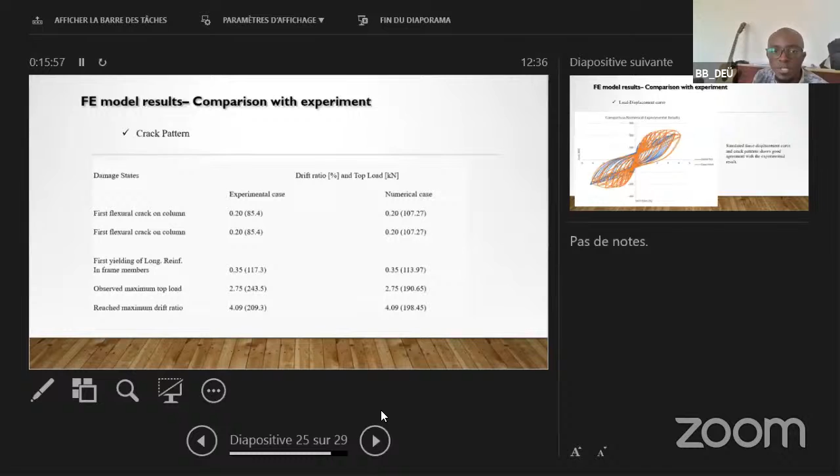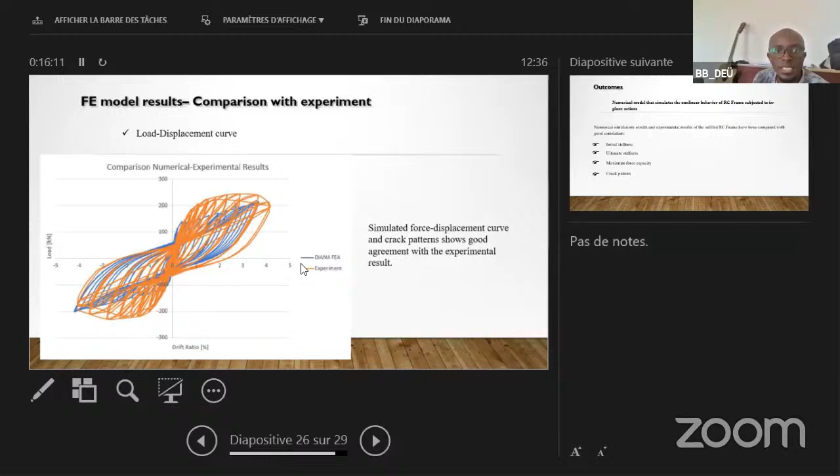So the numerical simulation and experimental result of infill reinforced concrete frame have been compared with good correlation in terms of initial stiffness, ultimate stiffness, maximum force, and crack pattern.

For future work, the calibrated model of infill reinforced concrete frame will be used to perform numerical experiments through a parameter study to investigate the influence of the mechanical property of infill wall on the strength, stiffness, and lateral capacity. Thank you for watching.